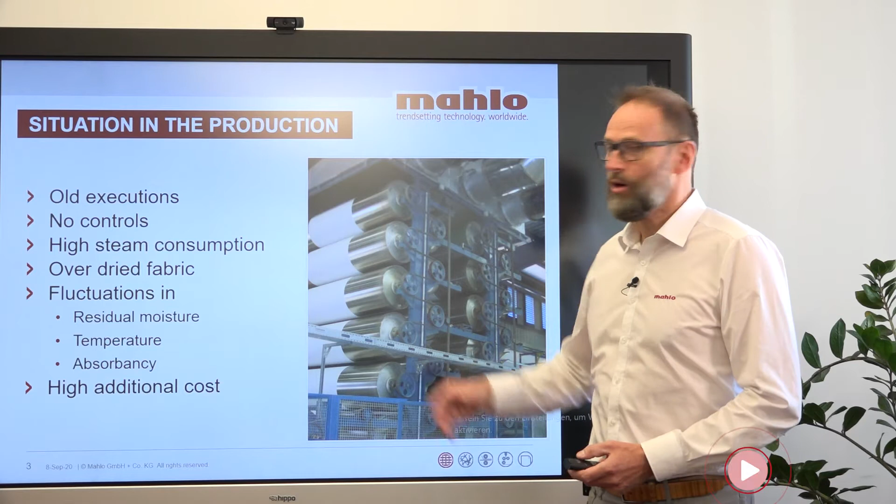Today's subject is how to save money during the drying with our Atmoset process control. We all know that cylinder dryers are most of the time very old execution. So what we see over here is rather an exception. And what we see in the production are very old executions which are very inefficient, and they have a lot of fluctuations in terms of the drying, in terms of the residual moisture, and therefore also in terms of the

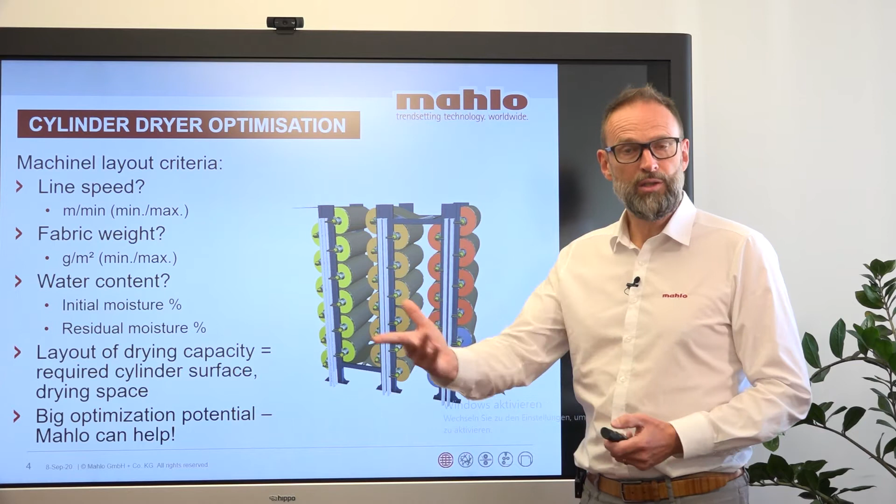absorbency. What we need is to have a very stable output on one hand, and of course we need to save money, because how are those units calculated? We have a continuous range in the wet finishing, which is defined mainly with constant speed, because all the other compartments have a certain content which only allow a speed in a certain limitation. And therefore, those cylinder dryers are calculated by the maximum weight and the maximum speed, and of course the water which is inside the fabric.

So if you come to a lighter fabric, most of the time, if you don't have any control on these units, you have an over-dried fabric. And this leads not only to an unnecessary consumption of a lot of steam, it also leads to a huge fluctuation in the absorbency and the residual moisture.

And this is mainly what needs to be avoided, because if you have an over-dried fabric, what is happening is that the fabric, mainly at the cotton side, is taking back the moisture from the environment. It's a hygroscopic fiber, and that means that it really drags the water out of the air and refills it, but this is only happening on the outer sides of the A-frame.

The inside of the A-frame will stay bone dry when it is standing there, and that will lead to an imbalance, a delta between the outer layers of an A-frame and the core of an A-frame. And you can imagine what is happening if you put that lot to the cold pad batch dyeing.

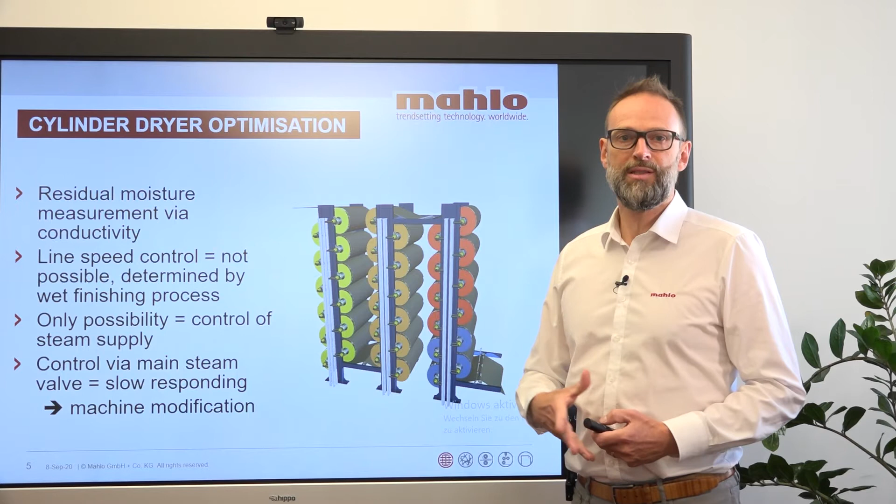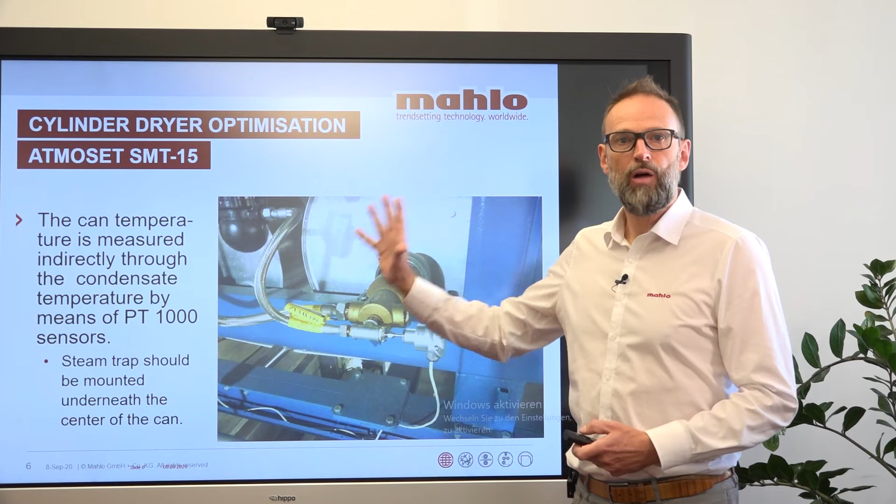This is the one part. And then of course we need to have some tools to control the steam. And this is done first of all by the steam traps. So we take the condensate temperature, because the condensate temperature is giving us a clear indication about the temperature of the cylinder dryer itself. So we know the basic load more or less.

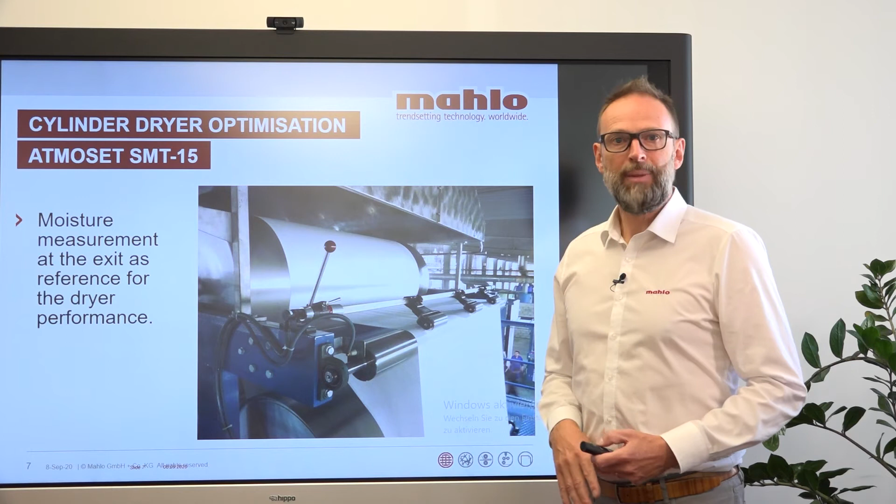And then finally we take what we really need, and this is the residual moisture. The residual moisture should be basic, and this value is then controlling the steam valves at the beginning in the cylinder dryers in order to increase or decrease that basic load. So as a bottom line, we have those different closed loop systems which are controlled by the residual moisture at the very exit of that process.

And with this, we can control the residual moisture over the entire time, no matter if there's light fabric or a heavy fabric. If there is a heavy fabric, it will, of course, open up all those steam valves in order to increase the temperature. If there is a light fabric coming, that will be either recognized by the recipe management or, of course, by the residual moisture, and then will automatically put all the valves into position to adapt the temperature of the can dryer accordingly. And this is just one part.

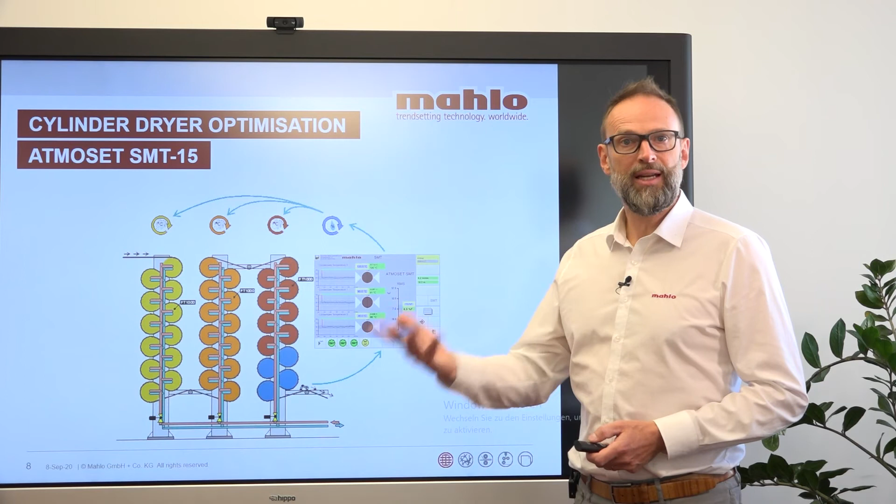The other part is, of course, that all those values will be put into the network. You have the values, you have the data, you can make use of the data. So by putting a new Atmoset into your old cylinder dryer, you can also automatically integrate that cylinder dryer into your professional data network, and you can start using Internet of Things or Industry 4.0.

So again, the big benefit, of course, is that you reduce the energy, that you reduce the steam. You only use the steam amount that you require for that particular fabric. And as a consequence, you will have a stable and constant output of your residual moisture and your absorbency. So the main savings will happen by reducing your failures, by increasing your right first time at the next step during the cold pad batch system or during any other padding system afterwards.

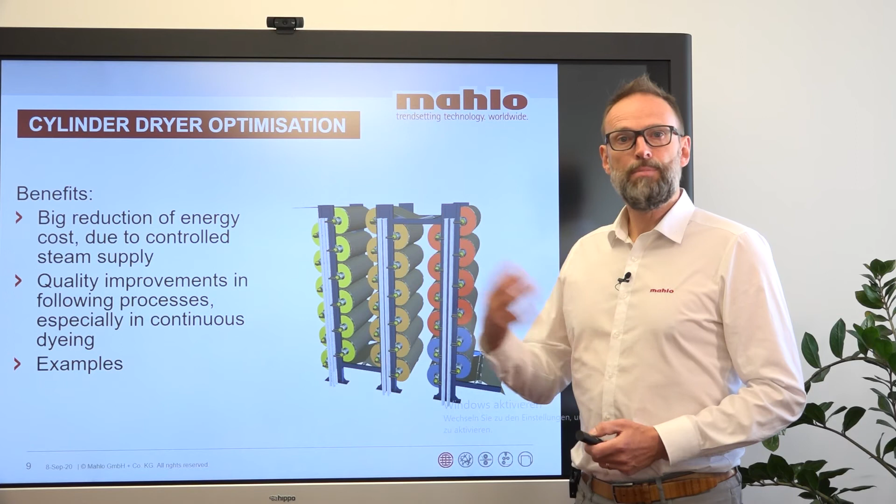And once again, I mean, 36% is already a very high figure, but the main saving will be done by reducing your claims, by reducing your reprocess, and by increasing your right first time. Thank you very much for listening to us, and we hope that we can also contribute some savings in your company. Thanks a lot.

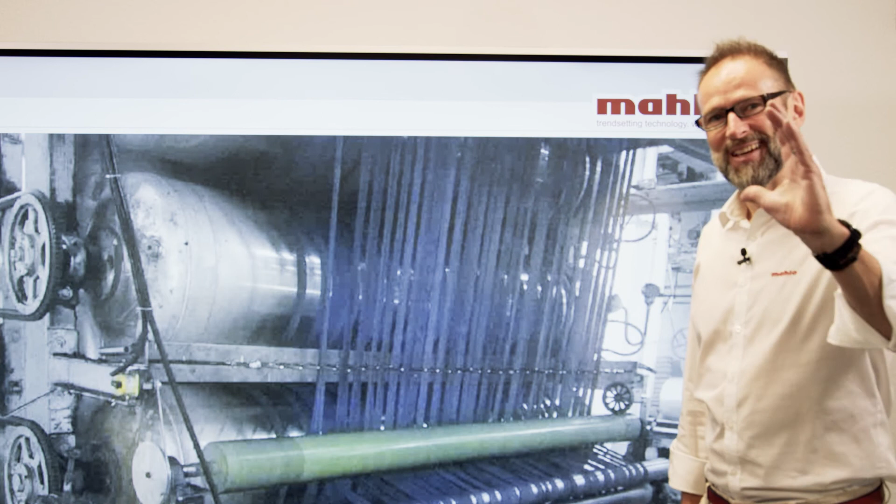Thank you very much for watching. Now you should know everything about controlling the cylinder dryer, even the older ones, and you should know how to avoid a lot of unnecessary steam, energy and money.